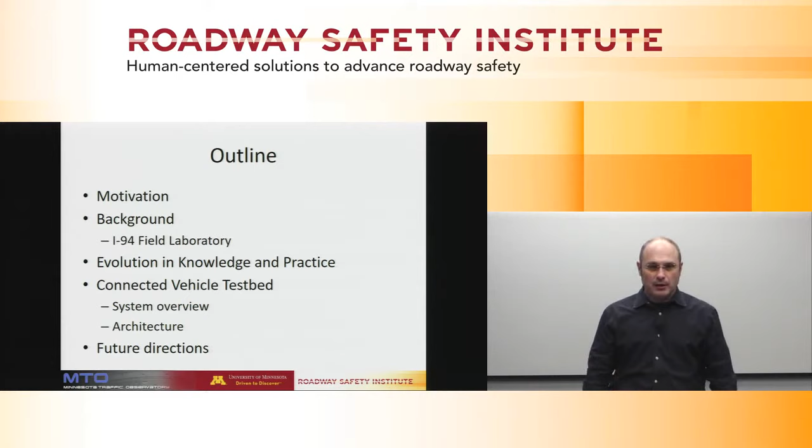A small outline of what I'm going to talk about. Just one slide about the motivation behind the work we've been doing, establishing a field laboratory on I-94. The background: it started in 2002, so it's been many years that this process has been evolving. How that original 94 field laboratory has evolved, helping advance both knowledge and practice, and the subject of today's presentation, how it evolved to be a connected vehicle testbed, or has the foundation to be a connected vehicle testbed. I'm going to share with you the system overview and architecture, and I'll finish with what is to happen in the next couple of years, because MnDOT has seen the value in some of the things we're doing, and they are supporting continuation of this effort.

So the motivation is known to all of us. Freeways are nothing but free most of the days, and there's congestion, and all of us, hopefully not with any element of surprise, have to come to a stop. We have to join a queue on the freeway while going 60 miles an hour or more, in my case. Apart from the congestion we encounter every day, this surprise of meeting the queue, this surprise of changing the state of flow from uncongested to congested, is what captures a lot of people unaware, and we have rear-end collisions and other even more severe crashes. These crashes account for more than 25% of the congestion we encounter on the freeway.

The rear-end crashes are the dominant type. So from early on, we were looking for ways to prevent them. My work as a master's student at the University of Minnesota started in developing systems for incident detection, because back in '94, all the way to '98, we did not believe we could actually prevent the crashes. So 100% of our effort was devoted to detecting them as soon as possible and managing the incident in the fastest and most efficient way, so it can get out of the way and the road can start working normally.

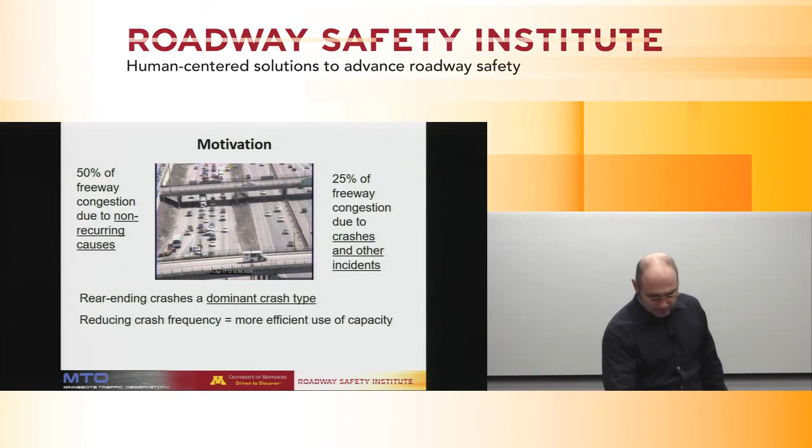So we took that idea and we ran with it, as they say, and we were fortunate that a lot of people have been unfortunate very near us from here.

I-94 westbound in downtown Minneapolis, and you can all realize where this picture is from, has been for quite a long time now, and these statistics are from 2002, have been the highest crash location definitely on the freeway system of the Twin Cities, but in kind of frequencies pretty much unprecedented anywhere else.

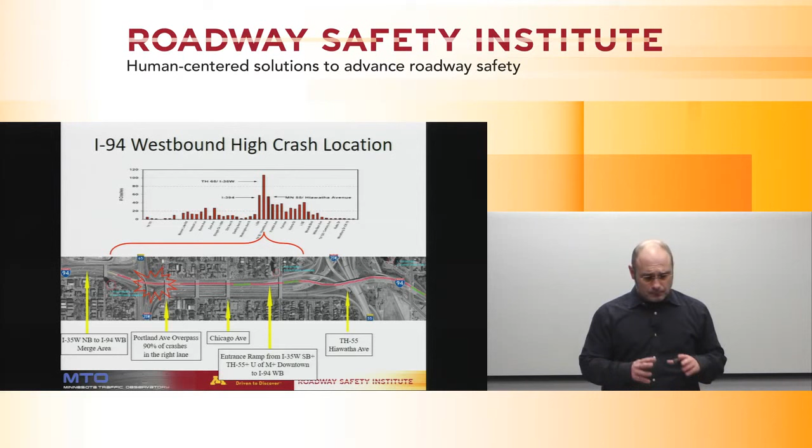We are talking on average one crash every 2 days. So it was a perfect location to ask the question, are there any specific

types of traffic? Are there any, other than individual human behavior, causal reasons for these things to happen? As I sometimes joke with my students, if we think that it's somebody's fault, then the only explanation for this location would be that there was a cone of stupidity that was covering this place, and anybody who enters it loses 90% of its IQ instantly.

Because the statistics do not suggest that it's a fault only of the drivers. Because they would have had crashes in a similar way in other places they encounter congestion. This is not the only congested place in the Twin Cities.

So we needed, in order to understand what happens - and this is an example of what traffic looked like until last Monday, by the way. Now it's shifted to the right.

We have a very specific pattern here that is encountered in other places, but here is very extreme. You have a downstream entrance, the 35W northbound to 94 interchange, which is bringing a lot of traffic.

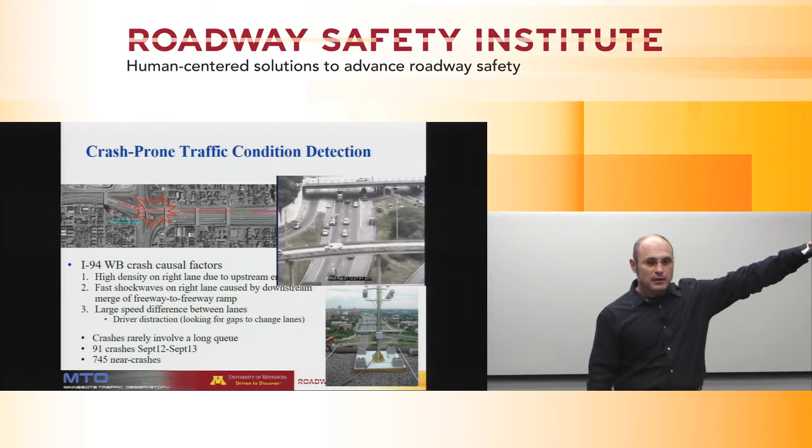This is a view from one of the high-rise buildings that is overlooking this area, and we put our own surveillance cameras there, and we put our own machine vision traffic detectors, autoscopes, and we had the ability to collect a complete video

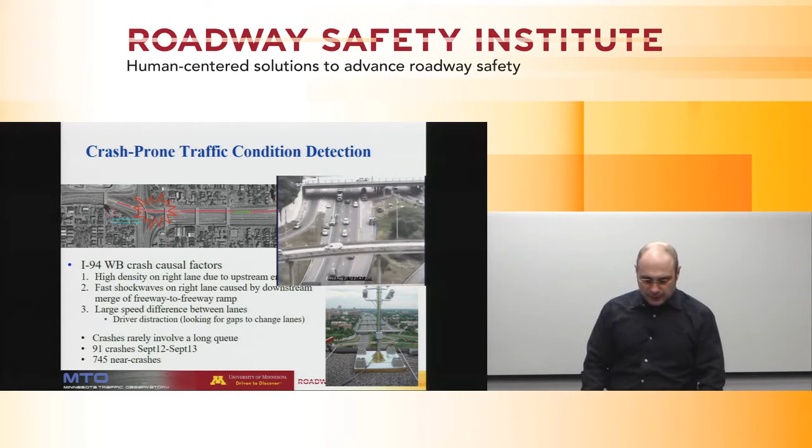that describes the entire sequence of the event. And I'll show you more details about that - actually, I'll go now.

So, as you see here, we have 3 cameras, and actually 2 of them are a machine vision sensor that gives us seamless video coverage of the queue from the point it starts at the merge and all its travel. And actually, as I'm going to say in the following slides, we have so much coverage that we can see the congestion spreading all the way to Riverside, which is more than close to 2 miles away.

Because in 2002, when we established this, we didn't know what was going on. We just know that there was a very big concentration. Actually, me and Professor Davis, when we started this, we

hypothesized, okay, MnDOT collects crash statistics in quarters of a mile. They don't pinpoint it in higher definition. So we looked at the statistics, and our hypothesis was that all the crashes would happen at the upstream merge area of 35W southbound to 94 west. Because you have all this huge traffic coming in, they have an auxiliary lane to mix in. That's where we thought that all the crashes happen.

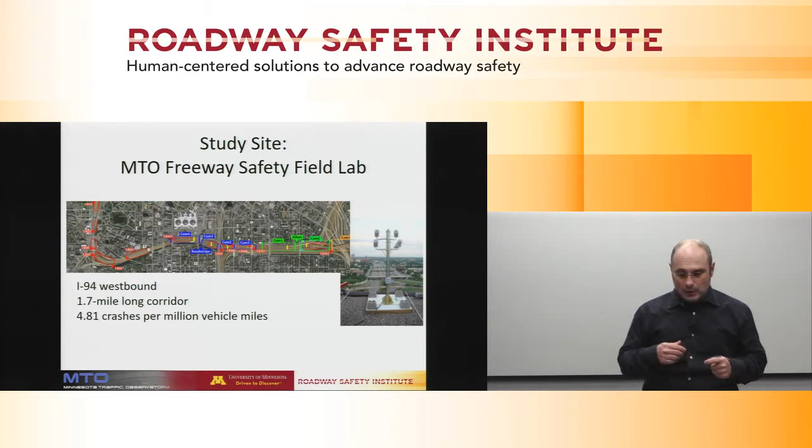That curiosity and these research questions is what created the original I-94 field laboratory, which is comprised of 3 high-rise building rooftops where we placed our equipment. From that we had continuous, seamless video coverage from 3rd Avenue all the way to Riverside.

Back then, the best sensor we had that could give individual vehicle measurements and speeds was the autoscope. There was no Wavetronix radar yet, and the loop detectors give you aggregate data. Since they're single loop detectors, they only give you an estimate of speed, not an accurate speed measurement.

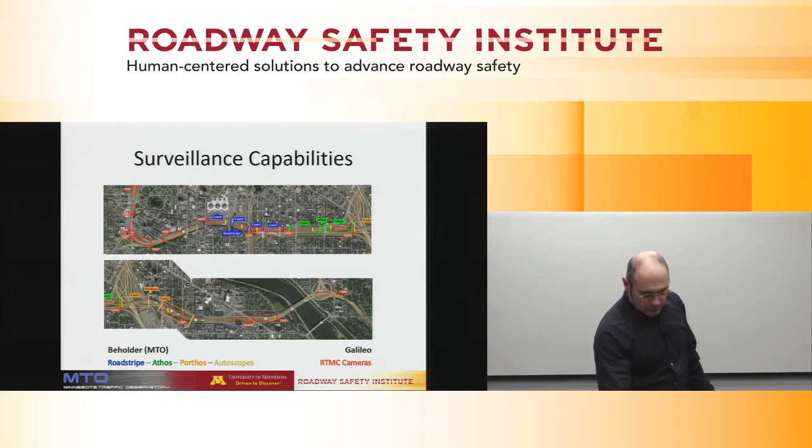So what we did is we deployed the autoscopes and pointed them to the area upstream and downstream of where the crashes were happening. We wanted to look at the traffic conditions that precede the crash, because congestion moves backwards.

And we put more sensors in individual places. Now, these sensors were cutting edge back then, and in some places still are, but they give you spot measurements. You get a measurement of the vehicle speed, but you don't know if that vehicle was accelerating when that speed was measured, or decelerating, or doing something else.

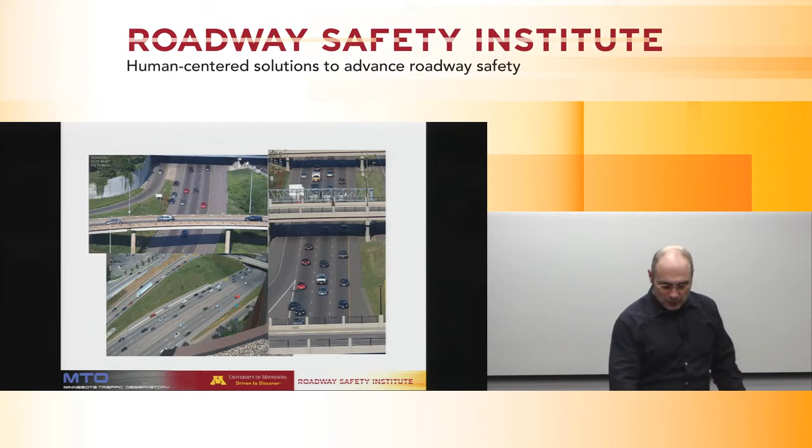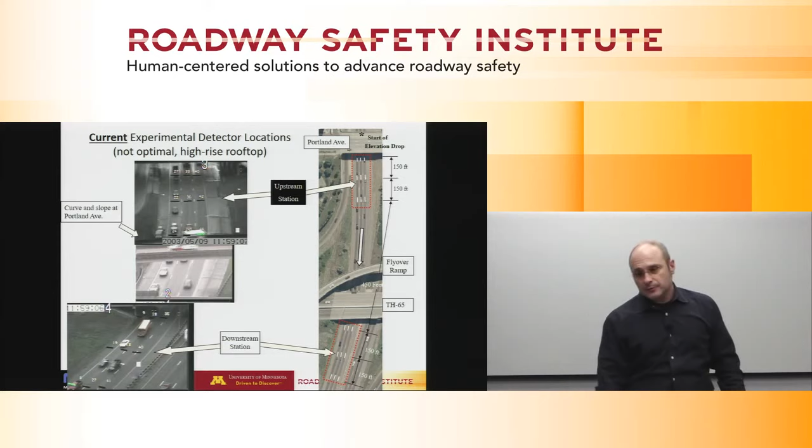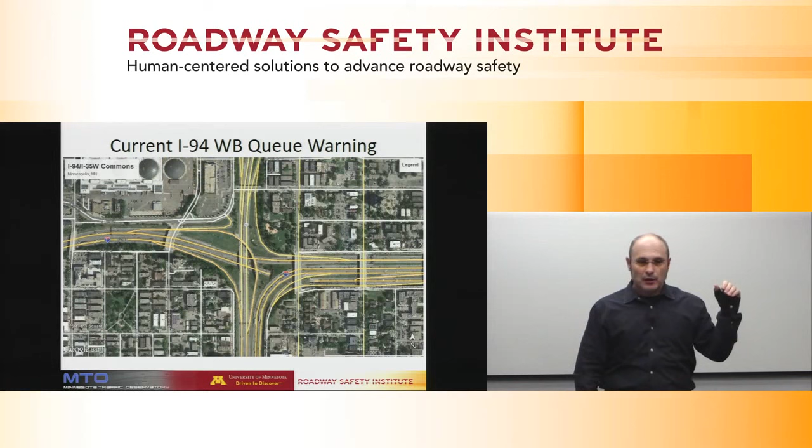So with these measurements, specified into specific areas, we developed a queue warning algorithm. Now it took many, many years, and this is a little video about that. It took many, many years for the Minnesota Traffic Observatory, with the help of MnDOT, to actually implement the queue warning system. It happened at the same time the RSI project happened, and became a part of it.

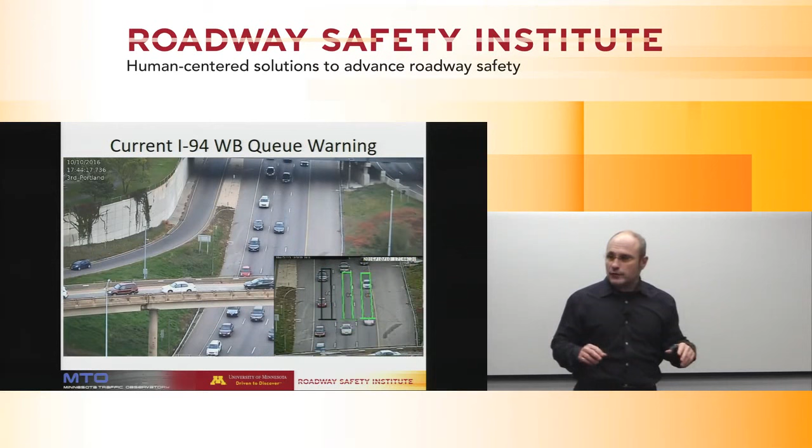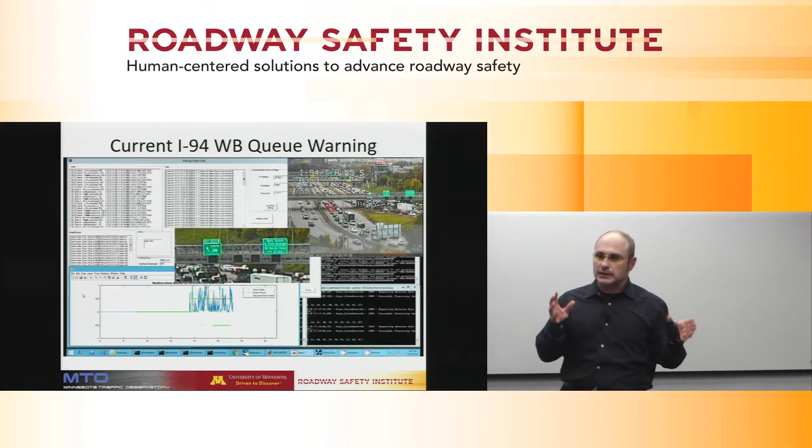So right now, for the last 2 years, and until last Monday unfortunately, those 2 autoscope sensors have been sending real-time data to a computer at the Minnesota Traffic Observatory. That computer runs our infrastructure-based queue warning system, called infrastructure-based because the way to communicate the message of the queue is through the infrastructure.

So what happens is that computer generates a crash probability, and through an algorithm decides if it should raise the alarm or not. If the alarm is supposed to be raised, it sends a message to IRIS, the traffic operating system of MnDOT at the Regional Traffic Management Center, and IRIS activates the 2 upstream intelligent lane control signs that existed until last Monday. They were removed, and I will come to that why in a bit.

So what you see on this picture is the program that calculates every 2 seconds the probability of a crash. That probability is this blue line. It's fed to an algorithm that takes that and other things into account and decides every 2 seconds if it should raise the alarm or not.

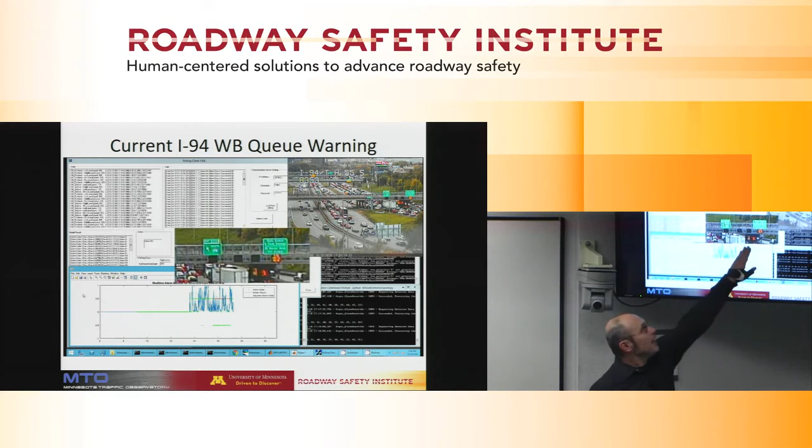And when that happens, a slow warning, slow speed ahead, is activated and stays activated for as long as the system thinks drivers need to be warned. If the road recovers and speed picks up again, there's no need. If the congestion worsens and has passed this point, it also shuts down, because there's no point warning anybody if they're going at 20 miles an hour already.

So this system, in the first 3 months, and it's a very little amount of data that we have analyzed so far, showed a 22% reduction in crashes. There are a lot of cases where the sign was up and people, like the Hennepin County Sheriff, still had a crash.

Where were they looking? Anyway, but it shows promise. But this, as I said, is an infrastructure-based approach. It is limited because it depends on point detectors that only look at this location. So if you have another more traditional location where the problem is not so localized, you would have to have

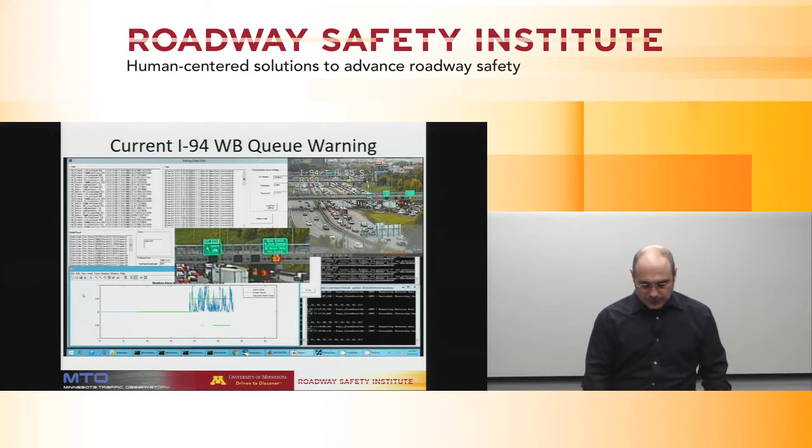sensors everywhere. Well, in the past, that was a dream. Now this is actually already happening, and we call it connected vehicles. And basically, connected vehicles are vehicles that are providing to other vehicles, and whoever listens, essentially us, their location 10 times a second. They are sending out what's called the basic safety message, which is their location, their speed, their heading, the yaw rate, the wiper status, a lot of things to anybody that listens.

So this technology has been developed now by the federal government and other countries in the world. And there's wonderful applications like the emergency electronic braking system, where your vehicle is listening to the 5th or 10th vehicle ahead of you, which there's no way for you as a human to ever be able to see. And if it sees that that vehicle comes to a sudden deceleration, it alerts you. If it's autonomous, it will actually hit the brake for you too. That would basically be the end of rear-end collisions.

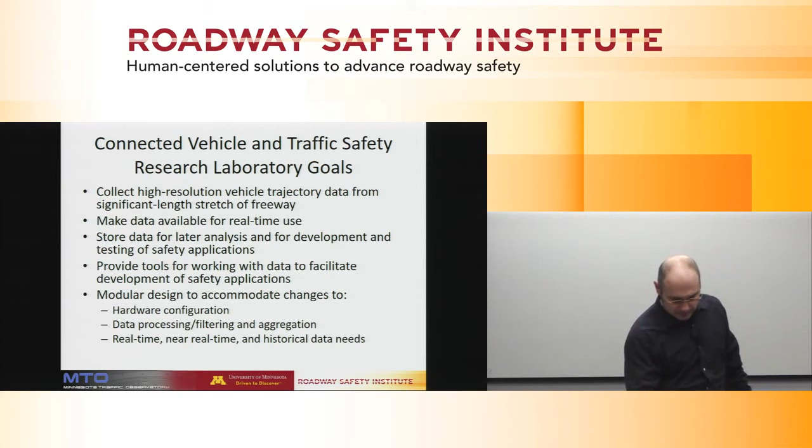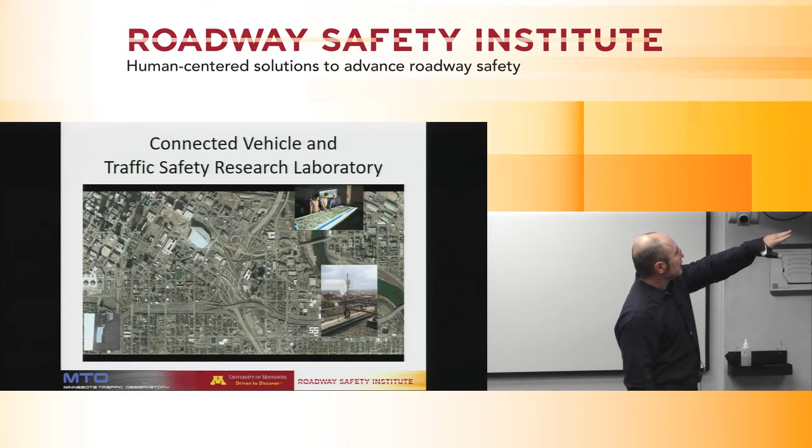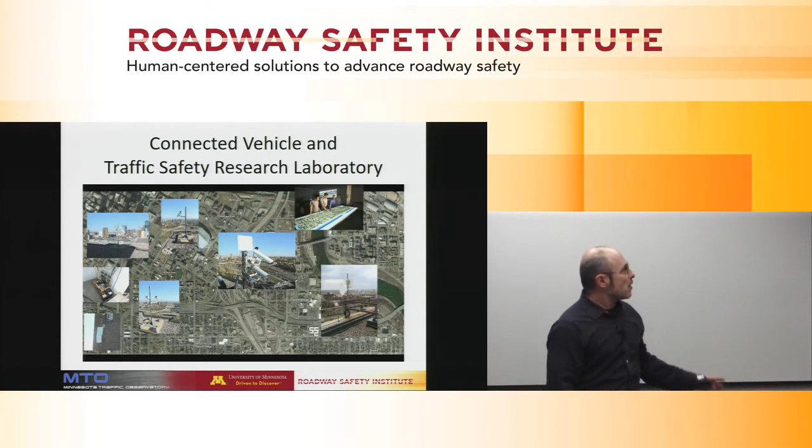So this is another video that shows very similar things to the previous video, but now it focuses on the new things. So our laboratory, the Minnesota Traffic Observatory, is directly connected with 3 rooftops. This is the 3rd Avenue rooftop. This is the Augustana or 11th Avenue rooftop. And the last one is on Cedar Avenue, the high-rise building. Those were the original rooftops. But these rooftops also give us wireless connectivity to the entire stretch of the road.

So we have our cameras. So as I said, this video overlaps a little bit with the other video that have seamless video coverage of the entire area.

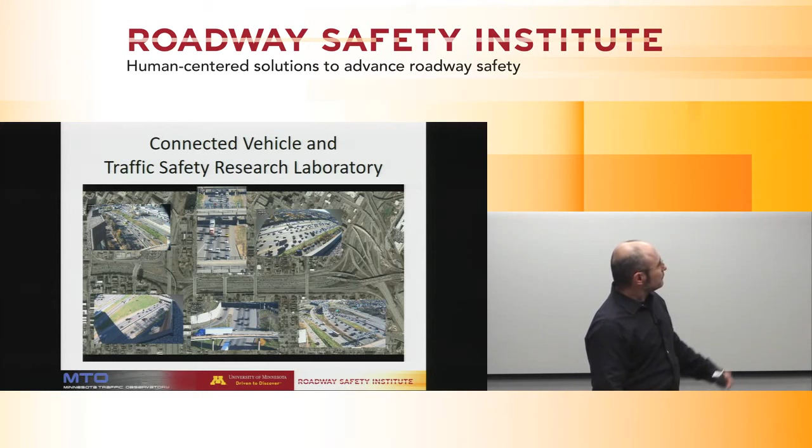Q. We have to perfect the timing a little bit better. Go on. Do I dare to fast forward? No, okay. Did I screw it up? Go. Okay.

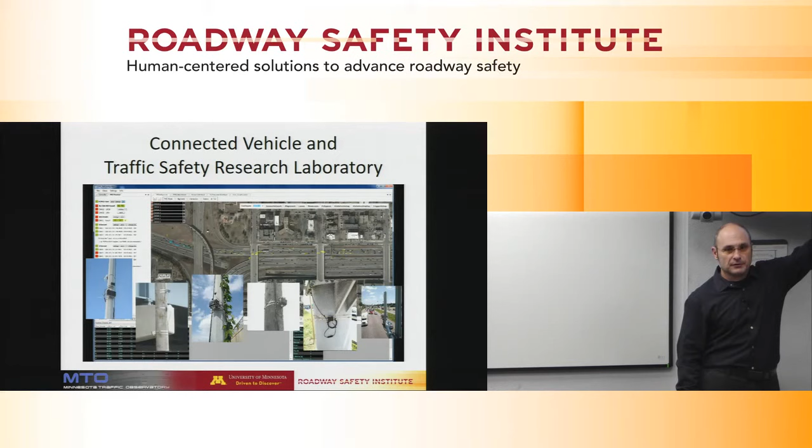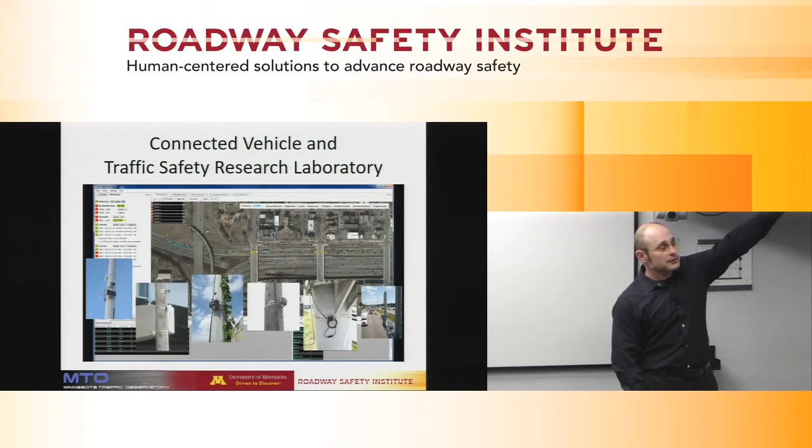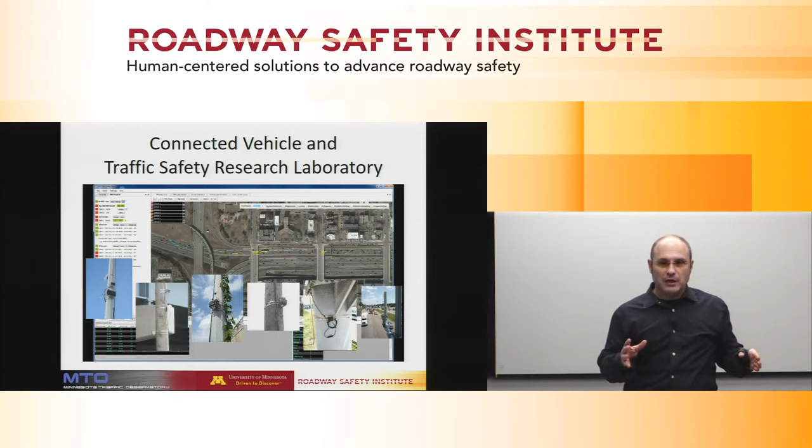So, the new thing now is that in actually 1, 2, 3, 4, 5 locations, we have placed these high-resolution radar sensors that cover the area from Chicago Avenue overpass all the way to halfway the 3rd Avenue overpass. This is 2/3 of a mile distance. And basically what we have in that space, we have almost continuous coverage of collection of trajectories of practically anything that moves on that road.

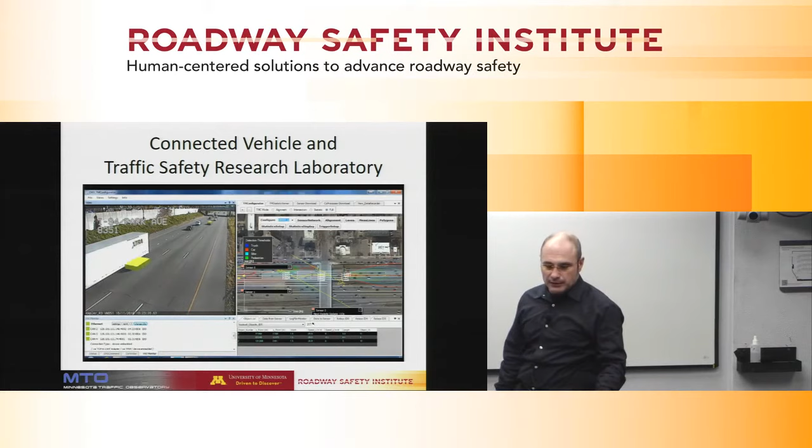And we have also placed dedicated cameras on each one of those radars, so we can actually get a real-time verification of their accuracy and data. So they're not perfect. I'm not going to stand here and say that they're perfect, but it is an amazing amount of data that we have. This system has been online for more than a year now, and it is collecting data. Half of it is collecting data 24/7 because it is powered from regular power. The other one is solar, so I'll explain.

So all the stations are synchronized with GPS clocks. So every piece of data, every piece of trajectory that is collected at 20 Hertz is time-stamped at a clock that is as perfectly synchronized with all the other stations as you can get, because they're all getting their time from GPS satellites. And they transmit this information in real time back to our laboratory.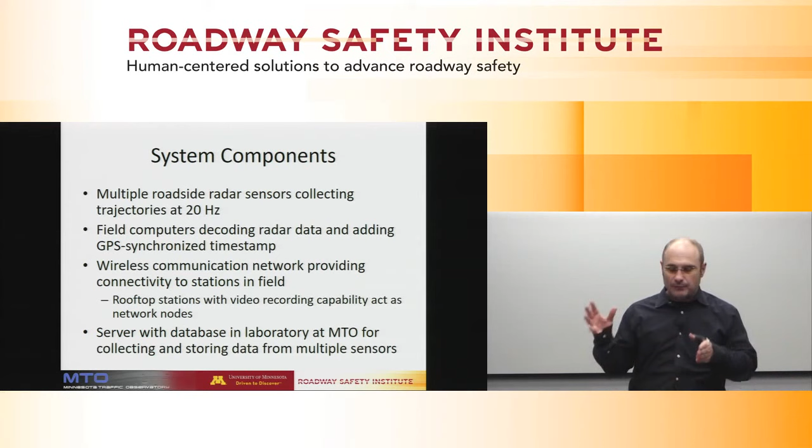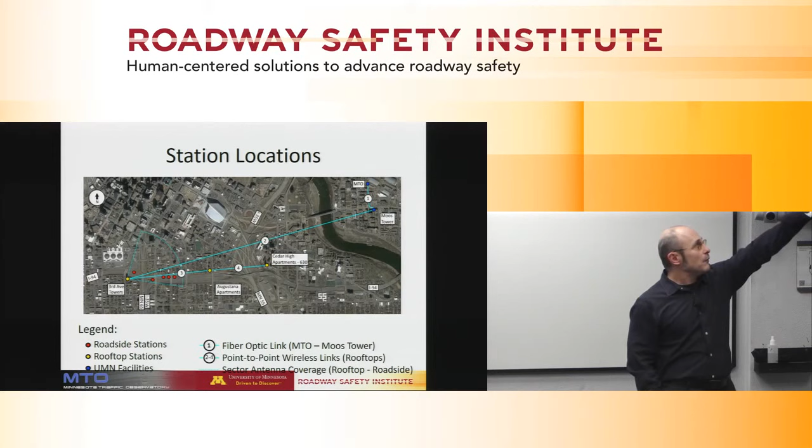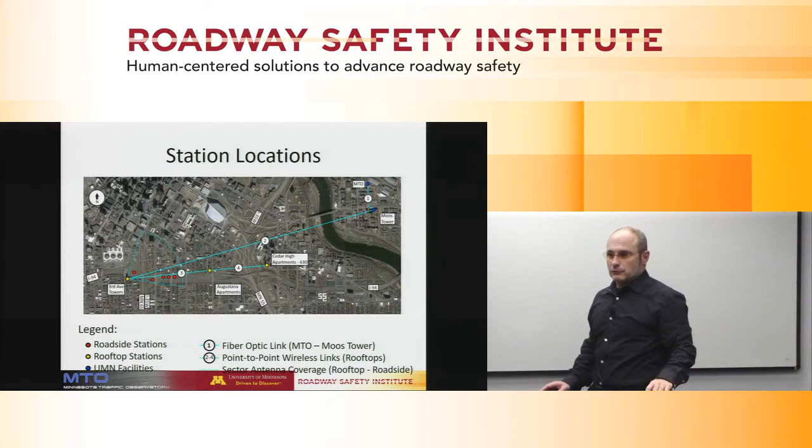The backhaul of communication is that from the MTO, we have a fiber optic connection to the rooftop of Moos Tower across the street on Washington Avenue, where we have our 5 gigahertz point-to-point radio link to 3rd Avenue, and from there we connect to the other ones. You would say, why did you go the long way and then come back? Because Cedar Towers are in the way. So from the other places you cannot see Moos Tower. So that basically makes these three rooftops part of the university network.

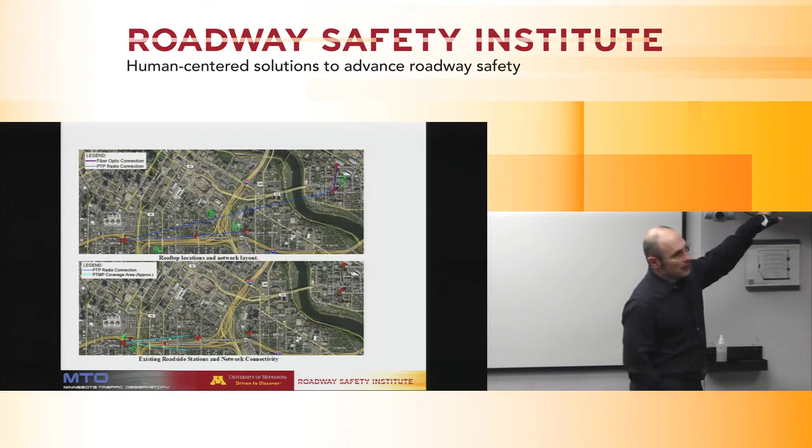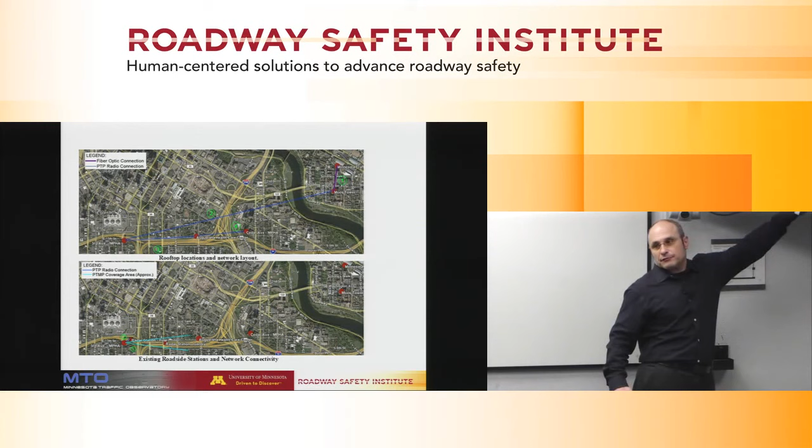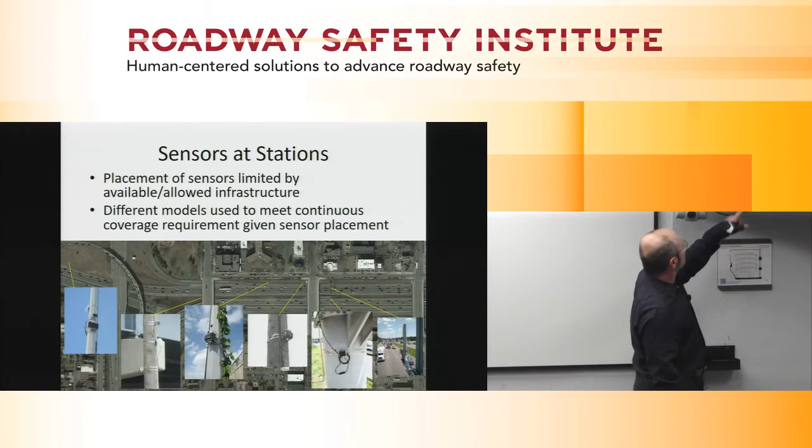From this, now we have another set of radios. These are point-to-multipoint radios. So we have a sector antenna on 3rd Avenue that is covering the entire stretch of the I-94 Commons, so our network is extended all the way to the actual sensor location. So these white boxes here, that is the radio. The black boxes are the radar sensors.

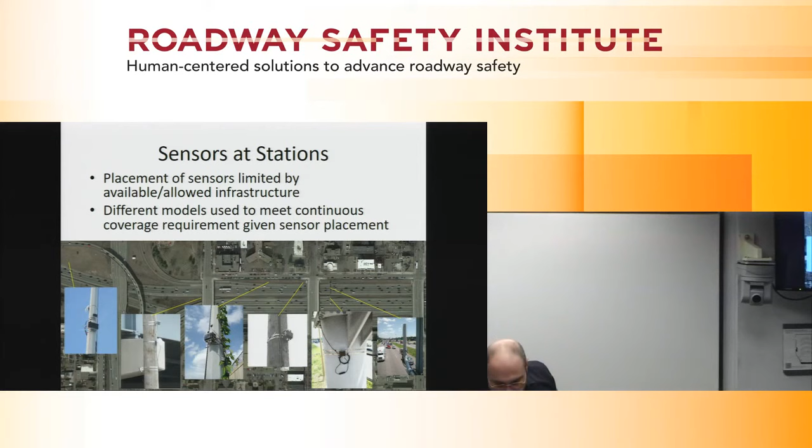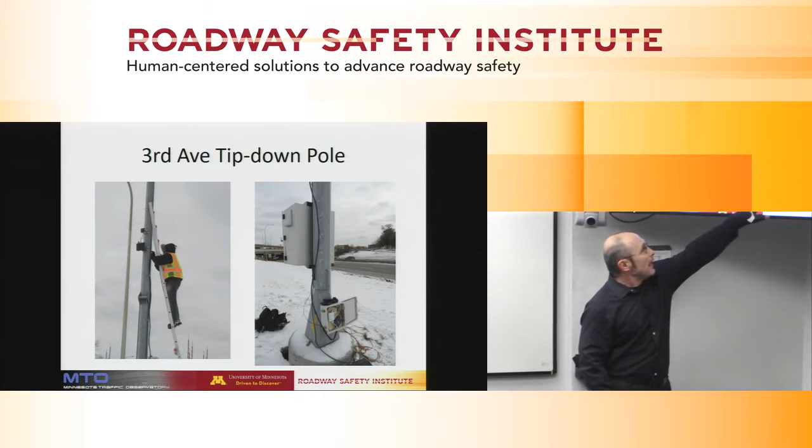And the first one that we deployed, guess when? Last winter. Well, actually, it was the winter before last. But anyway, it is on 3rd Avenue. This is a MnDOT ITS pole. It's a MnDOT pole that has a Wavetronix radar on it and sometimes a camera. We developed our own equipment. So our equipment is actually latched on with magnets on the pole. And the only thing it takes from the MnDOT cabinet is power.

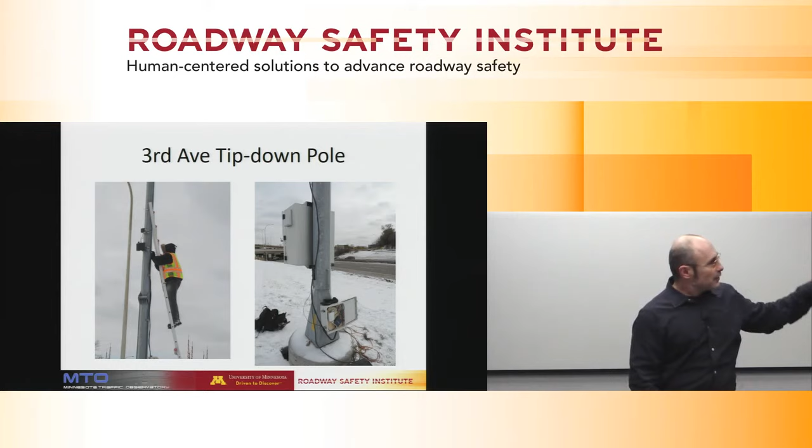So we made a promise a long time ago to MnDOT that we're not gonna be going into the right of way unless we have to, and we're not gonna touch their network or any of their information pipelines because of security reasons. So we're getting power, and from that we have the radar and a camera.

Now, the goal was to have seamless trajectories. So we couldn't jump to the next convenient MnDOT location. We had to put sensors where they needed to be. Unfortunately, where they needed to be, there was no power. And our funding did not allow hiring a contractor to dig ditches and install power. That's out of the question. I mean, we are still a university, not the federal government.

So what we do when we have a problem, we'll solve it. We'll solve it any way we can. So we, and specifically our lab manager, Gordon Parikh, and our other former and current employees, developed a solar-powered radar and radio station.

Basically, we hired Egan Electric to put a wooden pole where MnDOT allowed us to put it behind the guardrail, so there's no problem. So this is the Portland Avenue Bridge. And in this box, which was actually donated by the Intelligent Vehicle Laboratory a couple of years ago, we have car batteries and a solar controller.

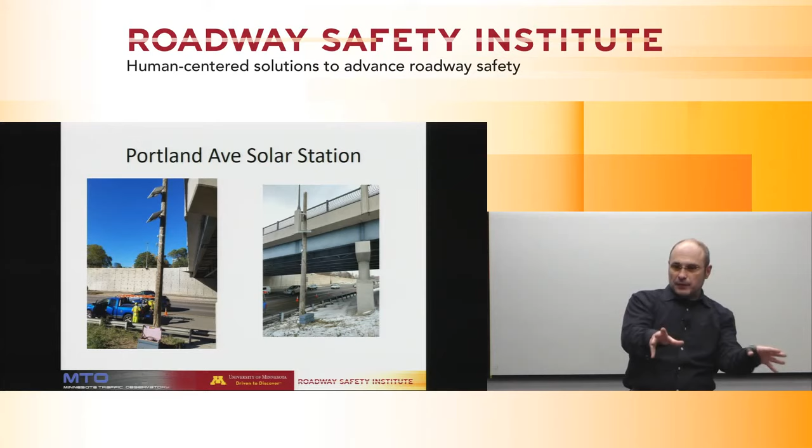On the other end, we have again a solar station. This is the Park Avenue Bridge that now the radar is looking west. The previous station is over there. So we have crossing detection. So at the farthest end of each of the radar stations, we have overlapping sections.

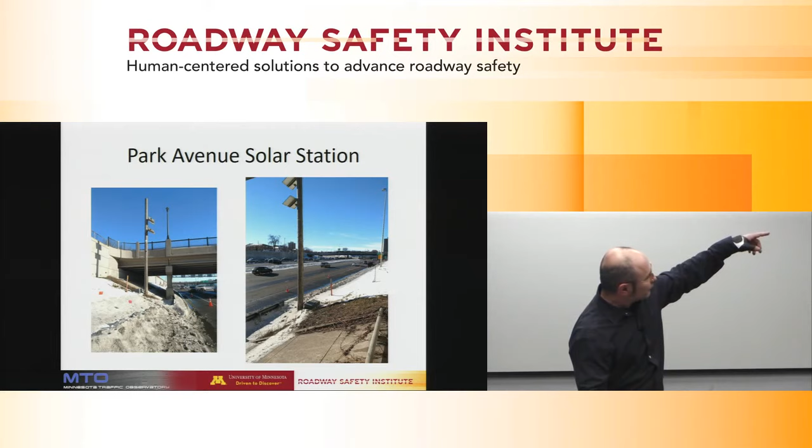On the other end, on the other side of the Park Avenue Bridge, is the Park Avenue gantry, Intelligent Lane Control Sign gantry, where MnDOT allowed us to mount two sensors. One sensor, and the two here only because we were experimenting at that time, there's only one normally, is right in the middle above the road, pointing straight east, and it sees as far as Chicago Avenue Bridge.

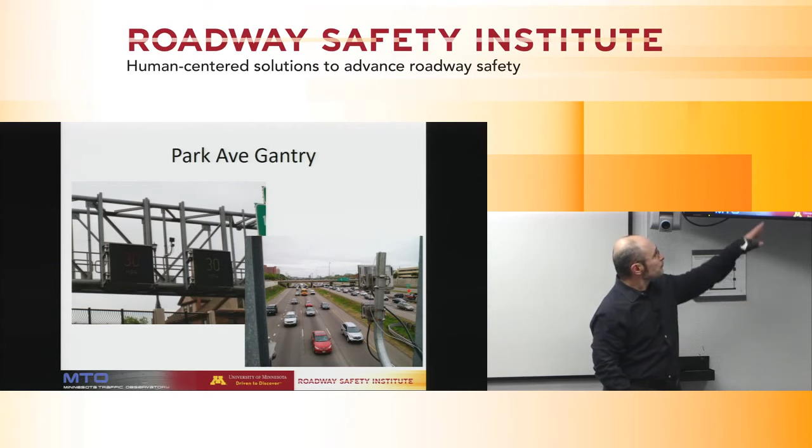And the other sensor is on the pillar on the south side of the gantry that looks underneath the bridge to close the connection with the sensor that's on the other side of the bridge, the solar station. So from Chicago Avenue overpass all the way Park, Portland, 65 flyover to the other end, close to 3rd Avenue, we have a complete coverage and we're collecting trajectories.

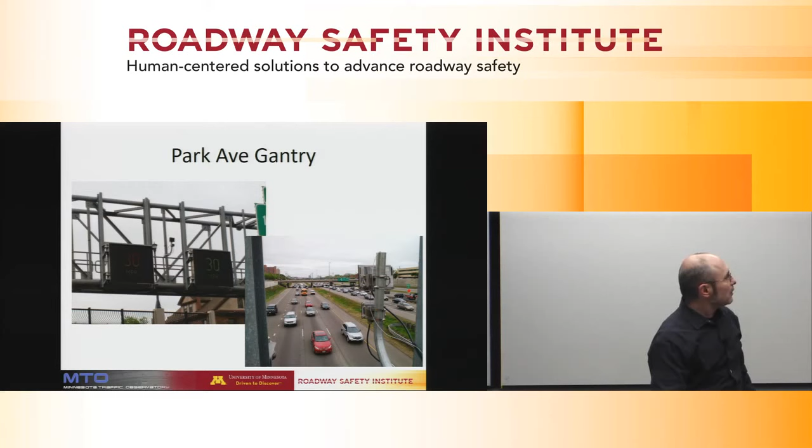These field stations were developed by us. These are Pi computers because they are very simple to program, extremely cheap, and they consume very little energy. So I cannot tell you too much details about the Pis because they're the babies of Gordon. But as I said, they have a GPS clock for time synchronization.

They are running a radar driver that was developed by Brian Davis, based on code that was developed a long time ago by the Intelligent Vehicle Laboratory for the CICAS project. So thank you very much for sharing the code and saving us trouble, because it's a very good library of functions.

Basically what it does, it is running a driver similar to the driver that you have on your computer for your mouse, for whatever, that connects to that sensor and brings the data to this little computer. There they're checked.

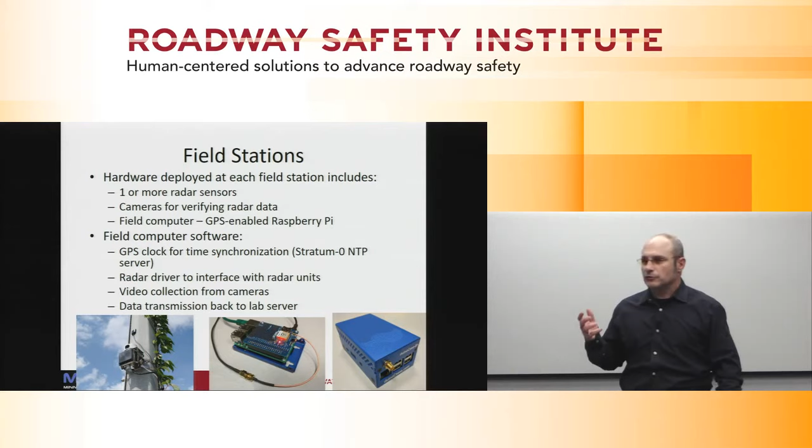If we were receiving the data, they would have an unknown amount of delay on the different hops from one radio to another, to another, to our server at the MTO, and their timeliness would not be able to be guaranteed. So the solution was to put the timestamp in the most synchronized and accurate way that we can think of, other than an atomic clock I suppose, and put it as close to the sensor where the data are collected as possible. From that point on, when the data is delivered finally to the database server, it doesn't make much difference other than for sub-second real-time applications, because they're already in the right order.

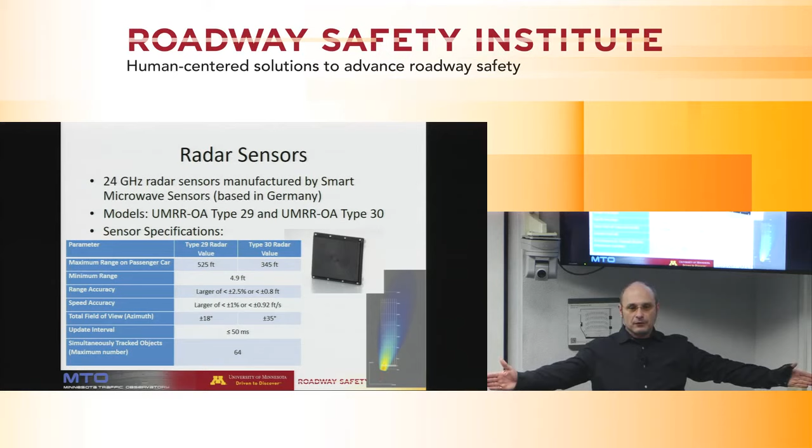The radar that we're currently using are 24 gigahertz infrastructure-approved radar manufactured by Smart Microwave Sensors in Germany. They are not the latest and greatest radar that you can get. They were when we bought them, but of course that was 2 years ago, so they're not anymore. We're using different types of sensors because with this radar, if you want to have distance, you're giving away width of coverage, and if you want to see more, closer, you're giving away distance.

So there are different antennas, essentially, that are forming the beam, and we selected them to cover exactly the parts that we needed. These are some information about the operation of the radar. The accuracy that they have is 0.1 miles per hour. That means because they're Doppler radar, they're only seeing things that move, and they need to be moving with at least 0.1 miles per hour in order to be visible. If two objects are moving with exactly the same speed down to 0.1 miles per hour, the radar will think it's the same object.

The newer version of this radar actually has multiple sensors on the same box, so it can actually differentiate targets with elevation and azimuth. We're hoping that with the new support that we're getting from MnDOT, we'll be able to get those.

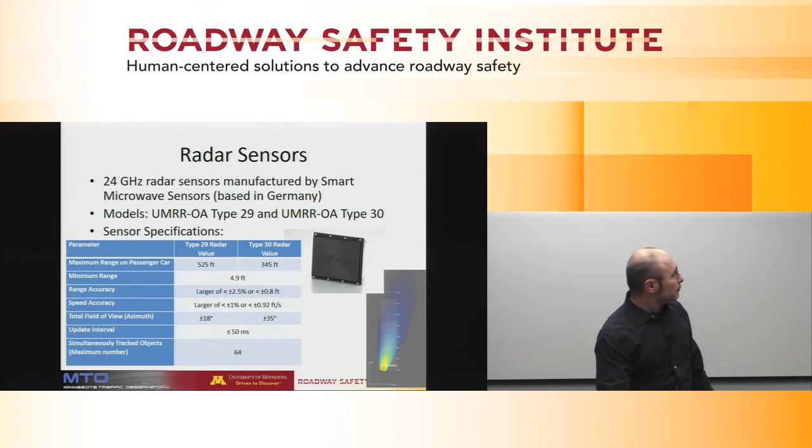I'll jump this. Now we're getting deeper into the system architecture. As I said, at the field near the sensor is where we have the driver connected to the sensor, and it receives the data through a serial connection to the sensor, so it's hardwired. At this point, we have the timestamp being added, and if the communication channel is open and everything is fine, this information then is transmitted to two places.

The IPC, what does IPC stand for? Inter-process communication. Thank you. Inter-process communication server that receives the information and will deliver it to applications that need it at that point. And there is one direct client that receives this information, serving specifically the I-94 data server at the MTO, which saves the information. Need to be done.

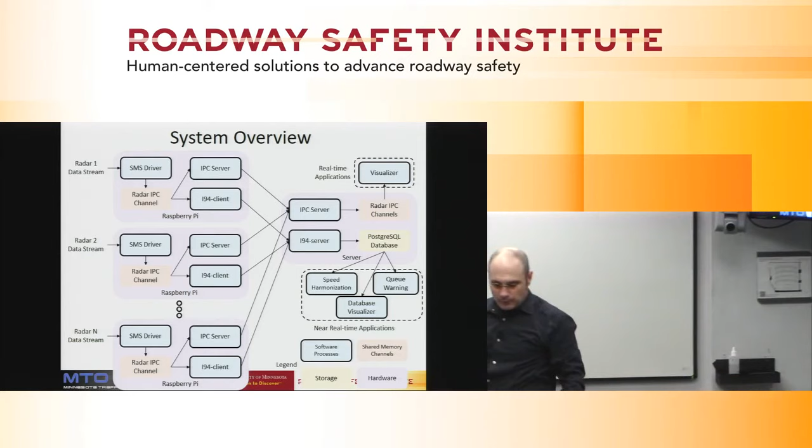Okay, I thought I had another 10 minutes.

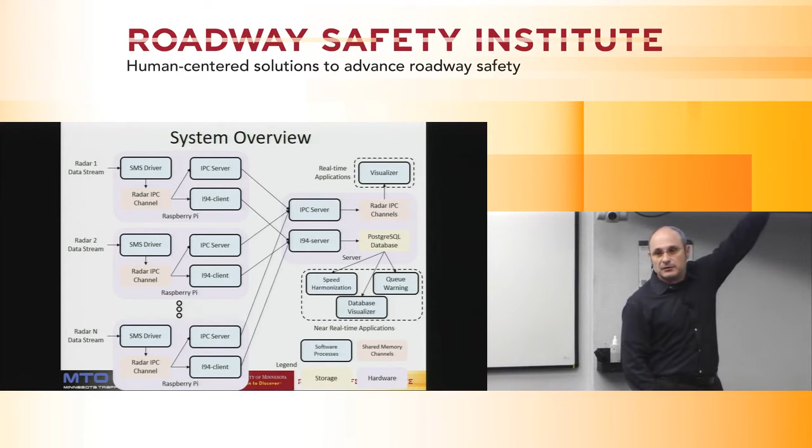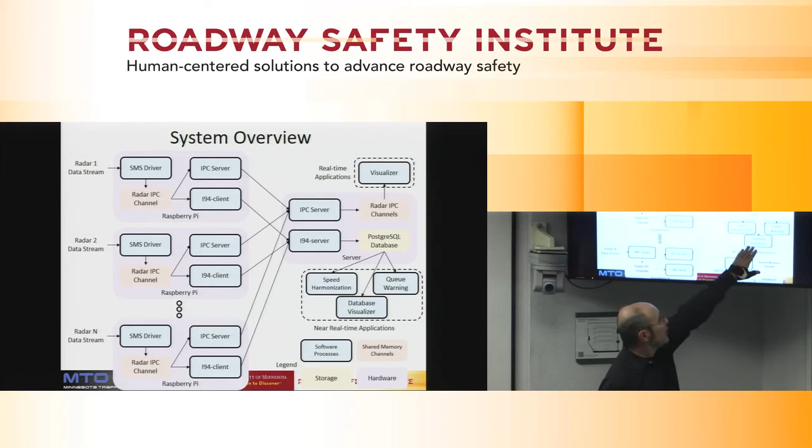So the data, the way that the system works, the data are present in real time, updating. So anybody who uses the API that we have, changed from the original Intelligent Vehicle API, can link their application and receive this data as they come. But also they are supplied to two applications that we have right now: speed harmonization, which is the INFLO speed harmonization, and INFLO queue warning algorithms developed by the federal government, that receive this information as if they were coming from connected vehicles, and a visualization program that we have developed.

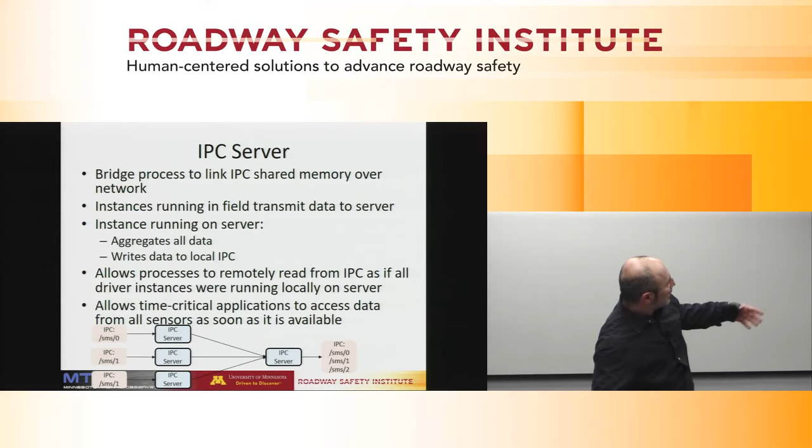I'm not going to go into too much detail on the driver, or the server, other than to say that it can receive data and save it if there are any issues with communication. If you run the visualizer in real time, and we need to put a map on this one, basically you will see the targets moving, and since at this point the data is not filtered in any way, you will see double targets in some cases when two radar are detecting the same object. This photo was taken before they were perfectly calibrated. Now they're overlapping each other.

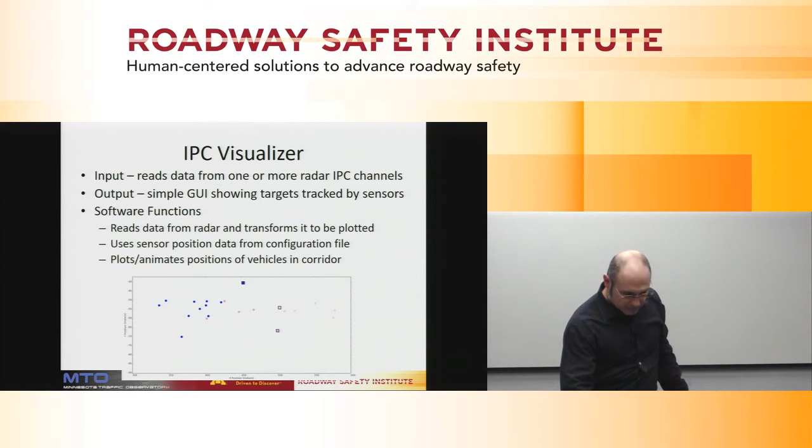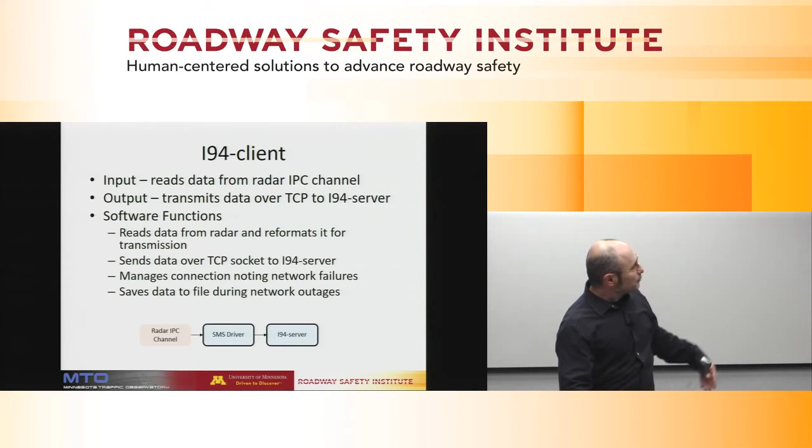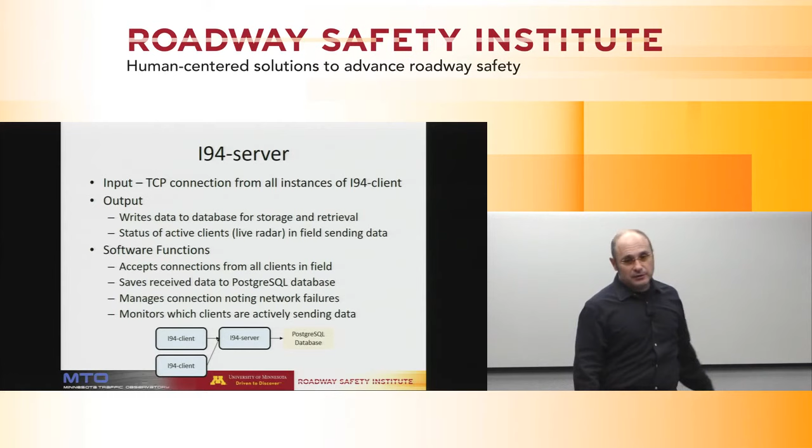The client, as I said, it reads the data, checks a few things, and then it puts the information on the server. The server, which now has how many petabytes, or what number of records? The records are not big because it's just 3 speeds and the displacement, but they're 20 hertz. Basically they are saved in a PostgreSQL database that has an architecture that we developed.

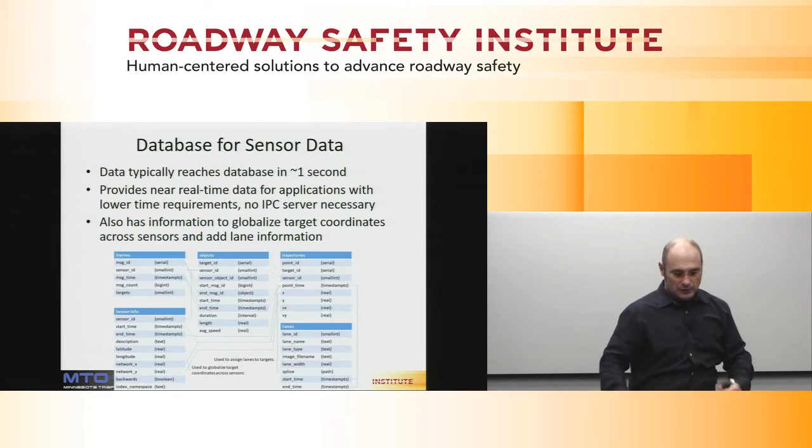Making, retaining the individuality of every sensor, so the data even at this level is unfiltered, but allows subsequent duplication of filtered data. So we don't want to lose any of the original collected information, even if we run applications that are cleaning them up and stitching the trajectories and generating better information. There are a number of tools written in Python that are reading the real-time or historical data from the database and can provide them to anybody who has use for it. And we run, as I said, the two control algorithms.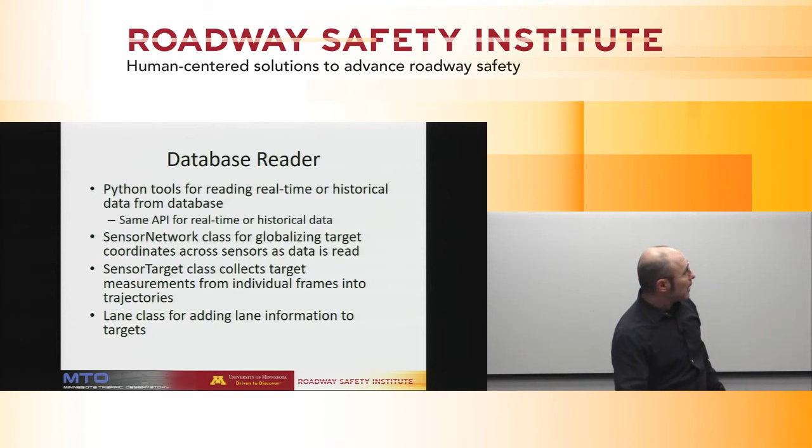We have an offline database visualizer, so if you want to work with the data saved in the database, you have the ability to query it for a specific time, location, or lane you're looking at, and it will retrieve the trajectories collected at that location and plot them.

So this is where we are right now, and we're looking for users. I've been advertising what we have because it's a great source of information, the highest resolution of traffic data I can think of at such a large quantity. There's a lot of research that can be done with it.

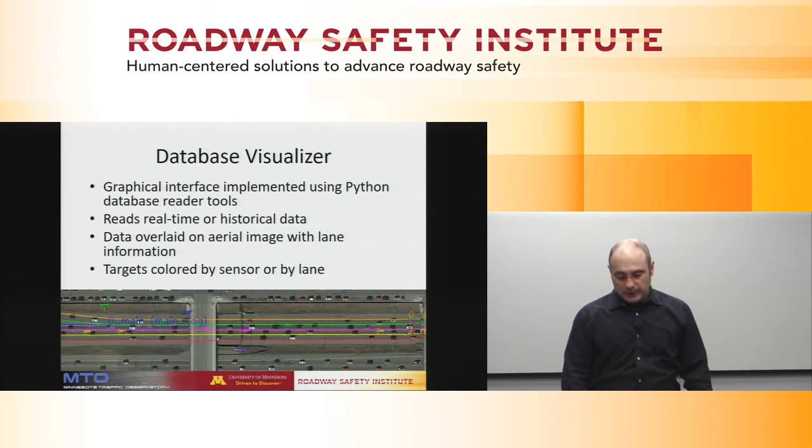One future research plan very recently funded by MnDOT is to extend the I-94 Minnesota queue warning algorithm upstream to Cedar Avenue. The reason is that where the two downstream stations, 3rd Avenue and Portland Avenue, are right now, there will very soon be a big hole in the ground for the next 4 years. So we'll have to remove them, but now we have the support to move them upstream and keep our coverage.

We would like to keep them in the construction zone, but that's uncertain. We're still going to have all our sensors on the rooftops overlooking the construction zone, so we'll still have point measurements, but the radar has to come out.

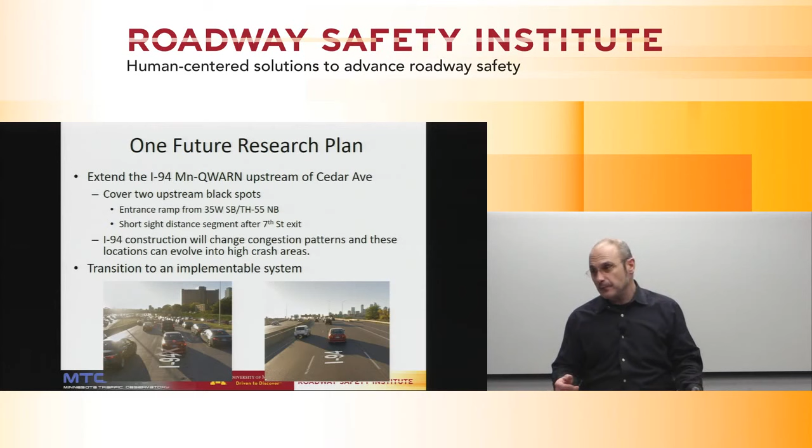Hopefully in 2 years from now, we'll be able to present results of a queue-warning system working for an entire year based on high-resolution data. And if by then we have connected vehicles, we can actually send the information directly to them. And that's what I have.

We don't have a lot of time left during the seminar slot. Sorry, I was hoping we'd have a few more minutes for questions. I get carried away. We can entertain one or two. Are there any offline? No? Any questions, please? I have a couple points here.

What was the percentage of reduction? 22%. 22% in the 3 months that you... 3 months, yes, 56 days to be exact. Okay, it's 3 months calendar time, but only Monday, Tuesday, Wednesday.

And not to discredit who I work for, but when you said earlier in the presentation, it's DPS that actually assigns the reference points to these crashes, not MnDOT. MnDOT has the method to go in and correct them, but it's only done if it's being looked at. Apologies to MnDOT. Anybody from DPS here? No? Okay, good.

Raj, John, is this data available online? Online, no, because that would require us to create web-based tools to access the data. But they're in such numbers that it's better that you ask and we give you a hard drive, so we can get the data to you if you want to do some analysis or estimate.